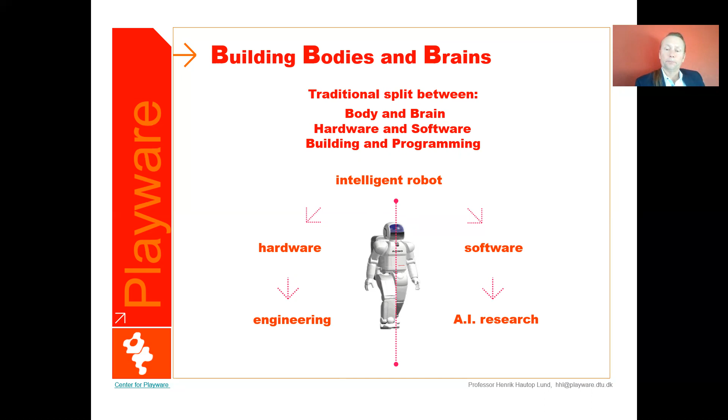We saw that last time we talked about the humanoid robots, how the body flexibility, the springs, the material properties, the environment, when the other players in the environment would have touched the ball, how could you then control if you are using the good old-fashioned way? Instead, we needed something where there was an interplay between all these different parameters playing a role, and not only saying that the only thing important here is the software, the AI in the software, but it's actually all those parameters together that we need to look at. So there is a big role of the body.

And again, we can explore that by splitting the body into, we could say, robotic building blocks, like we see here. So we say that a robotic building block is defined as having a physical expression, it's able to process, and then it's able to communicate with its surrounding environment. And that communication can, for instance, be to neighboring building blocks or through sensing or actuation. So in this case, if we have many building blocks, we would say the robot is constituted by the assemblage of all those building blocks.

So we would say that the overall behavior of a robotic artifact emerges from the coordination of a number of building blocks that each represent a primitive behavior. As we had in the behavior-based system, each building block is like a behavior, and we put those together, and then together, as we see on the video, that constitutes the robot, and together a certain behavior emerges from this. And you remember we talked about emergence earlier.

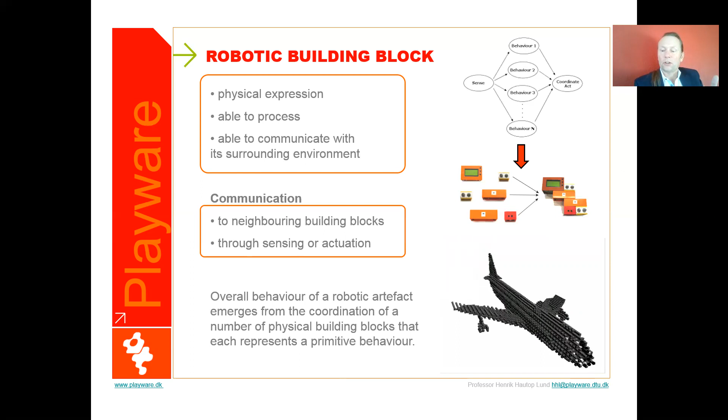Here in the video, we made a simulation of 7,000 modules following some chemical trails, and that would then lead to giving a certain body structure, as you can see here, when they're crawling upon each other. Something else emerges than just 7,000 modules, namely a certain structure. So you remember the emergence, we talked about that emergent behavior.

We would say it is the complex behavior that can arise from simple rules where the sum of the rules is more than just the single rules put together, but there's a complex behavior that arises from that correct interplay. For instance, when we see a flock of birds flying around, or a school of fish, or we talked about the example on the stadium with fans doing the Mexican wave.

So the behavior emerges from many simple agents that each have their simple behavior, but when they're put together, all these simple agents with the behavior, something bigger emerges. And that's what we're trying to do when we're creating the building blocks. So the building blocks are the small simple agents with simple rules, and then we put many of these physical building blocks together, and something larger, something coordinated emerges from that.

So one example of that is something like this. We created this in the HYDRA project: self-reconfigurable robots that can shape shift, that can change their own shape, as you may have seen, for instance, in films like Terminator, where you have one that can melt into another shape. So this we can actually do with physical robots.

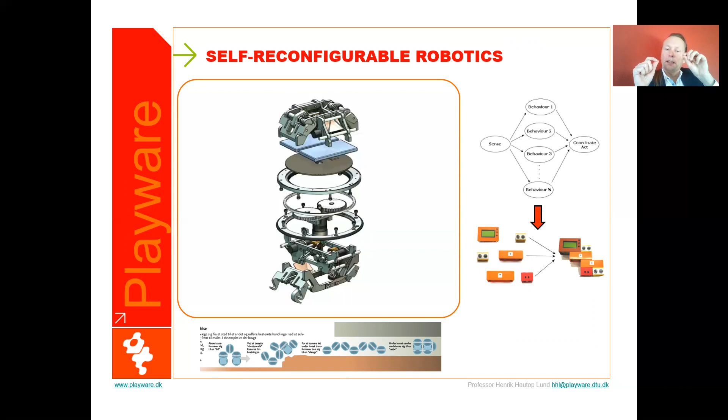If we think about the robot being built up of many atoms or many cells that are small robotic building blocks that can attach to each other, as we see here, they can move on each other, and they can change the shape from being a snake to a chair to a car, or whatever we may think of.

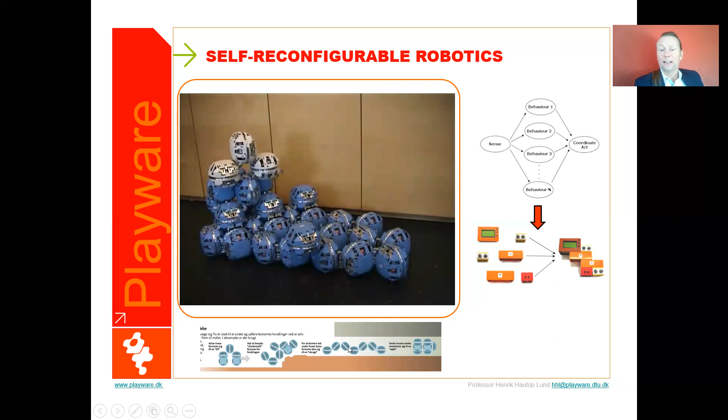Or as in the little cartoon here on the bottom, imagine a robot driving over to some place, then it crawls up on the ground here, and then it makes itself into a snake and into maybe a column here after an earthquake.

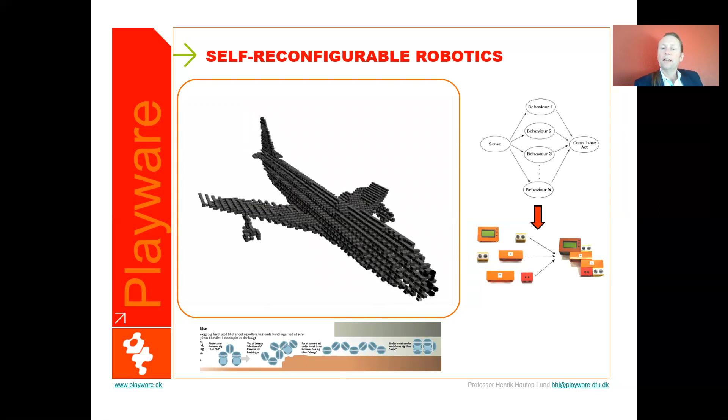If this is a building that has collapsed, then you can imagine this kind of rescue robot driving over there, crawling up, making itself into a snake, into a small hole, into the fundament, into the base of the building, and where it has collapsed, make itself into one or more columns that can sustain this until rescue workers can move in. And in this case, you see, we exploit this fact about being able to shift.

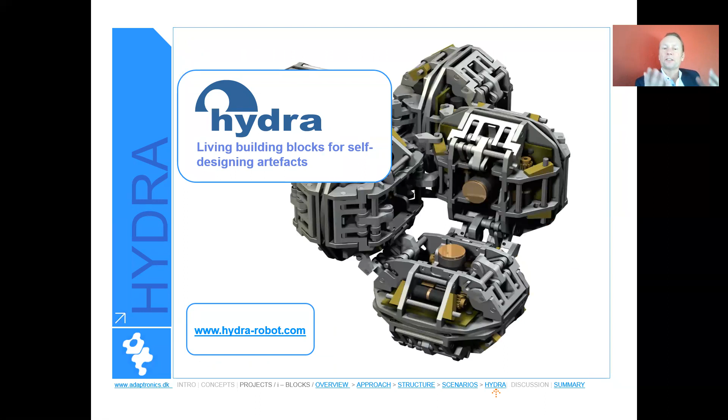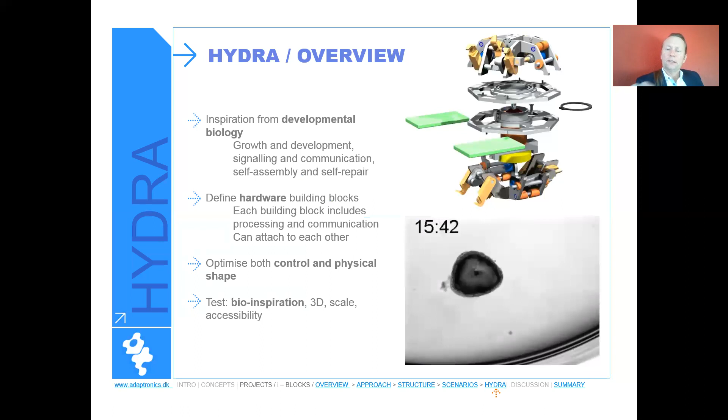So we explored that in this project here, trying to create these building blocks for self-designing artifacts. And the inspiration came from the HYDRA, from developmental biology, where you see on the video, this is a HYDRA. You can actually cut this small amoeba, and then after a short while, it will change itself into the original shape again. It will grow its own shape, so to speak.

So we took the inspiration from that and said, can we, in a similar manner, from the engineering point of view, create these artifacts that can grow their own shape, that can shift their shape from one shape to another. So in order to do so, we need to define the hardware building blocks, where again we say that each building block includes processing and communication, and they can attach to each other. And then, of course, we need to optimize the control and the physical shape.

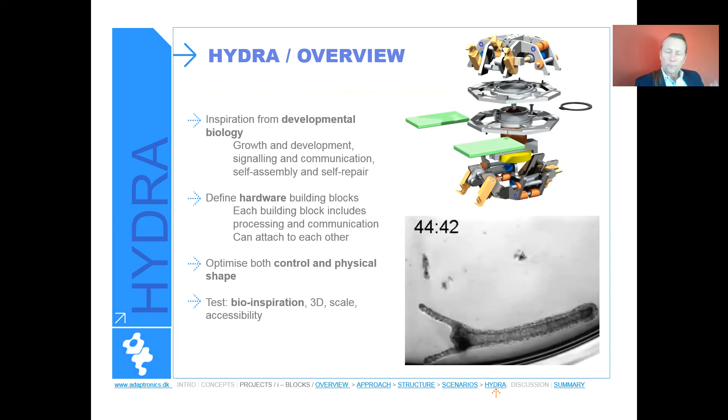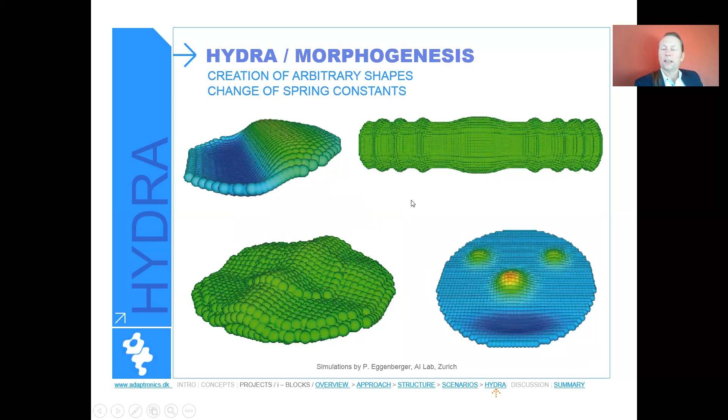So we can take some inspiration from biology when we do this, from morphogenesis, as was done here by our colleagues from Zurich, where they're creating arbitrary shapes from these spring qualities. You can see many modules here, and if the attachments have different spring qualities, then it will define different shapes to emerge. The shapes will emerge when these springs have the different constants, as you can see on these images here in simulation. So we can start doing simulation of this.

We can also start to simulate more precisely some modules that we would like to develop, like here, the ATRON modules. And for doing that, we looked at many different kinds of shapes and attachment structures and so forth. And we came up with this inspiration from certain atomic structures, where we would develop the modules as spheres that could rotate around the equator and have 8 connection points, so points where they could connect to each other.

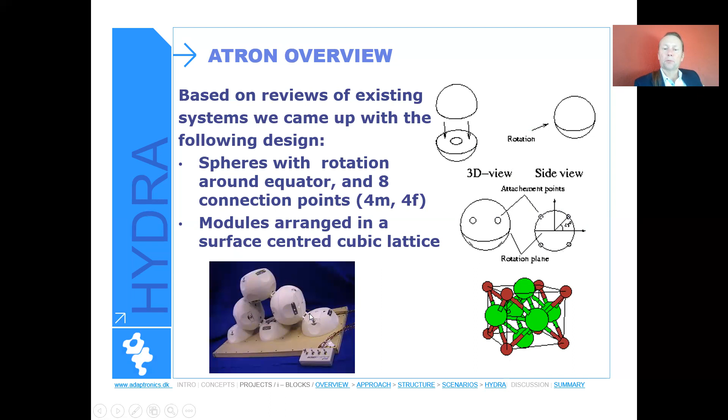And then they would be arranged, as we can see here on the bottom right, in a surface-centered cubic lattice, so that they would be able to connect in these different points, as we can also see on the photo here of the very first prototype of this system.

And then having defined that, we could start making a simulator and look at, can we do self-reconfiguration without actually building this in physics to begin with, but look at how these modules can attach to each other and traverse over the structure to make new kinds of shapes, or to make actual movements.

As you see here, this is a movement translating itself from one position to the next position, one step ahead. You can see in a while it will have made a full transition. Here it has made one step. Now it's going to take a second step where it translates itself from the previous position to the next position, and you'll see now it has taken one more step. So you can see it can by this crawl over the surface.

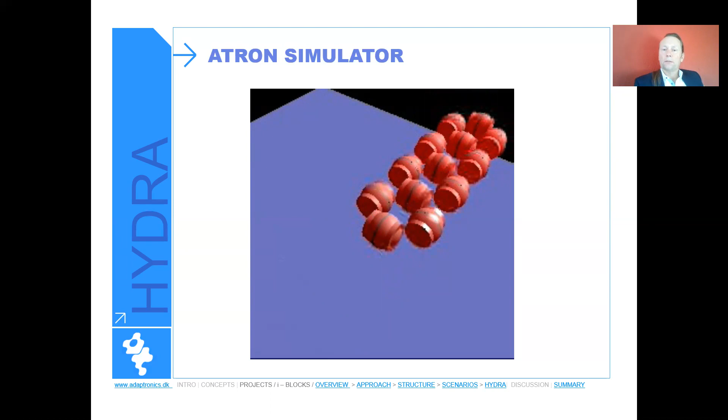So having that in simulation, we started to look at how we can create this in a physical form. As I said, with spheres that rotate around the equator, they have 8 attachment points. What you can see in the drawing here is one attachment point. This is a male gripper. So there are some male grippers like this coming from the top and then also from the bottom.

And they can go around like this, as I show with my fingers here, like this, to grasp around a bar, which is the female connector. They do like this and grasp around the bar. The bar you can see is here on this side, is this bar here. Or if we take it up on this image to the right, you can see the bar here where it attaches. And then, say in the middle, it can rotate around the equator attached to neighboring modules.

What we also did was that we actually put on the connectors an attachment point so that they could share the energy, the battery energy from there.

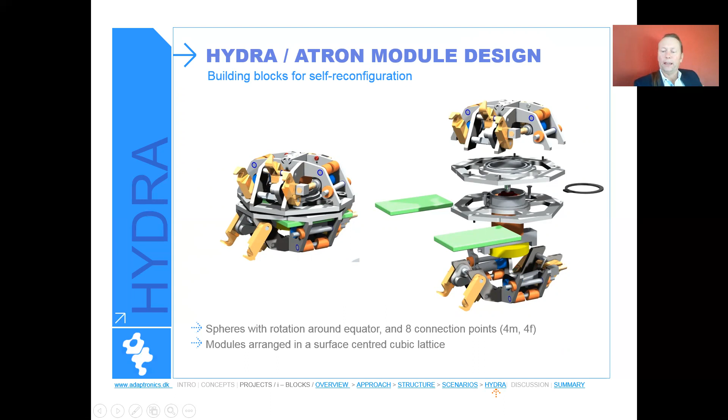And just to say the way that we developed this, and you may remember from the second video in this series, that we were talking about if we want to bring our research from prototypes out to the real world, and even in the end out to the real market, one of the best ways that we see doing that is through an iterative model, a cyclic model, where we're doing fast prototyping in this iterative fashion. So we get an idea, we make a design, we implement that design in a very fast manner as a fast prototype.

Then we try this one out, we test it and evaluate how it goes. And based on that, we make requirements to the next prototype round. So having analyzed the first ones in experiments, we build a new prototype. We deploy and test this again. We evaluate how this goes. By that evaluation, we come up with new requirements and we make the next prototype. So actually using this cyclic model, we can refine this step by step.

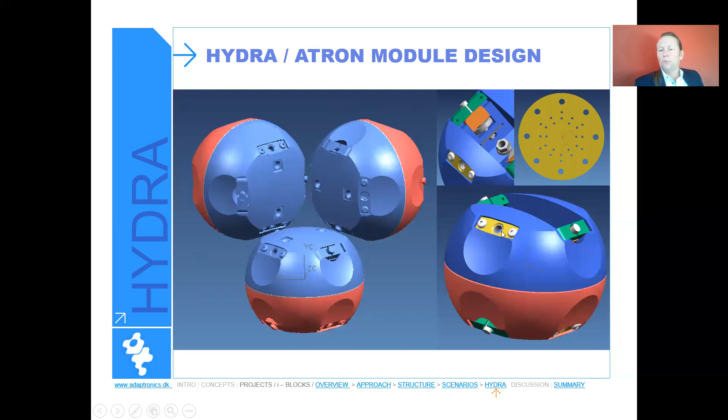So one of the first prototype rounds looked like this, where you can see the attachment mechanism is quite different. Here we were making some screws that would go out and they would go into this female connector here. And that worked to some degree, but not really to our satisfaction.

Another prototype round, you see in the upper left corner here, the image here, with a 3D printed shell here, with the connectors, as I talked about before, with the screws going out. Figuring out that didn't work, we made another kind of female. You can see the female connector here, the hole here, and then some grippers going out like this.

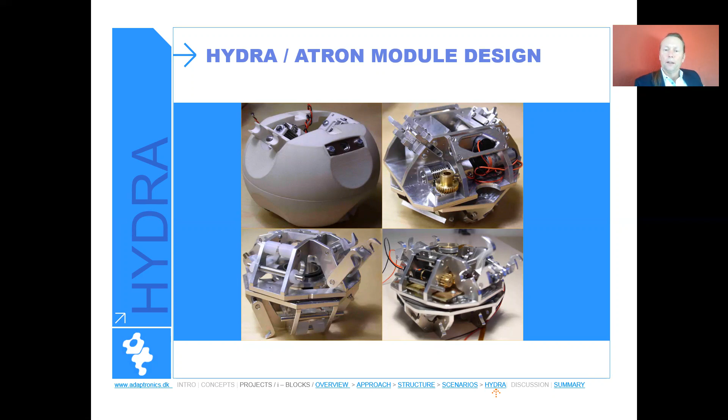And then later on came prototype round 3 here, and round 4 here, which are more the ones that I talked about before, with the male and female grippers, and the energy sharing and so forth, and a better mechanism for turning around the equator. So then you can see in the end, finally, with the light blue shell around it, modules like this, as you saw previously in the video. So again, an iterative development in cycles based on fast prototyping.

Or could we imagine that fully autonomous robots may be good for some things, but in other cases we need the human interaction, so that we may be able to go from self-reconfiguration to user reconfiguration. And that's quite interesting, because often when we think about intelligent machines, intelligent robots, we think of how we can create all this intelligence inside the robot, as part of the robot, and even, as we talked about, in the interplay between the body and the brain, the structure, the material, but everything controlled in the robot, self-steered, self-developed by the robot.

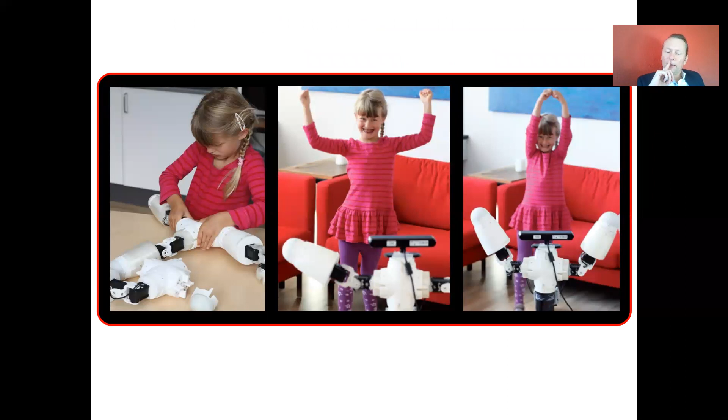Now imagine this thought: can you actually do this? Can you actually make systems where this is possible? Well, in this case here, you can look at the girl here. She's actually able to take modules that are created here and say, click, click, click, click. I put these modules simply together.

I create some kind of torso robot, and then I interact with this torso. I wave the arms and the torso waves the arms. I put my arms above my head. The torso mimics what I'm doing, puts the arms above the head and so forth. So she is on the left side, she's quickly building the robot, and then she starts interacting with the robot.

And here again, what we have done is we have split the robot into robotic building blocks, and we allow the user to build with this robot. So by physically building, she is creating both the body and the brain of the robot. So let's look at this in a couple of small videos.

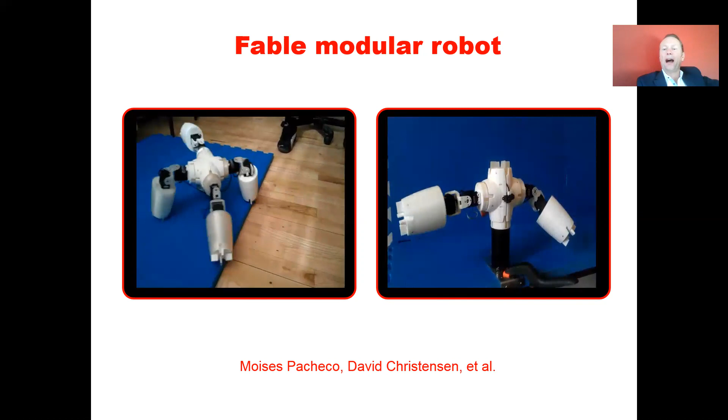Yeah, this is the Fable modular robot that we created in a larger project, and especially this was headed by Moises and David, who really worked a lot on this in our larger project on creating user interactive modular robots. You can see on one side, click, click, click, make a spider. On the right side, click, click, make this kind of moving arms.

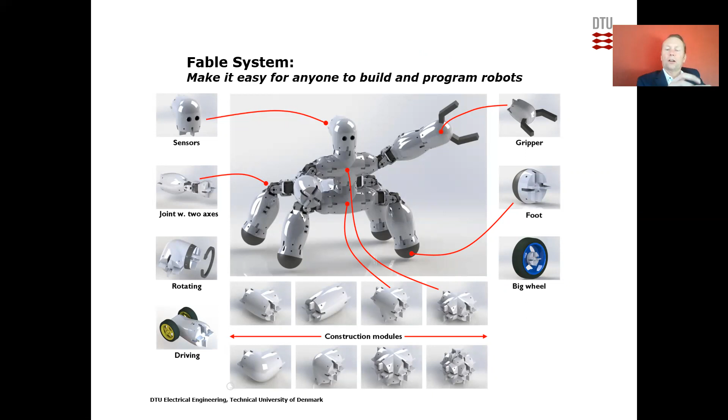So they have taken this further to create the Fable system to make it easy for anyone to build and program robots. Again, split this up into modules, many modules for sensors, modules for construction, modules for actuation. And then with this, you can build many different things. You have one system, but many learning opportunities. You can learn programming, math, physics while building the robots.

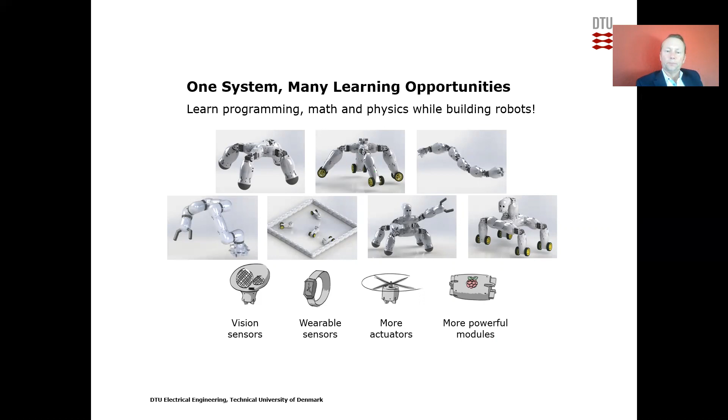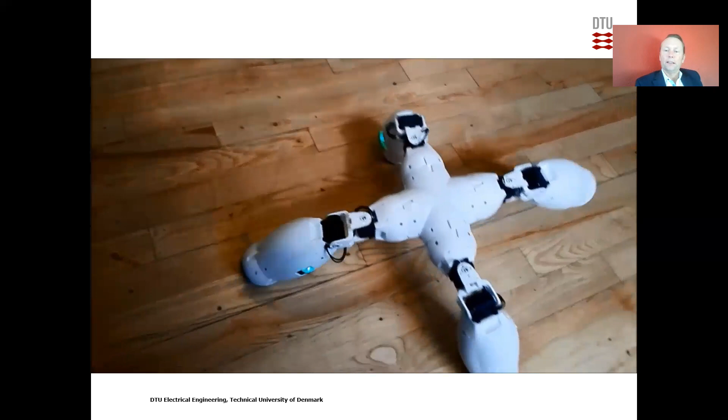If you, for instance, use this in an educational setting, with programming languages like some graphical programming languages like Blockly, or you can open up the box of the programming modules and see what's inside with things like Python. So they can do scaffolding like this. And here you can see a short video of the Fable robot system.

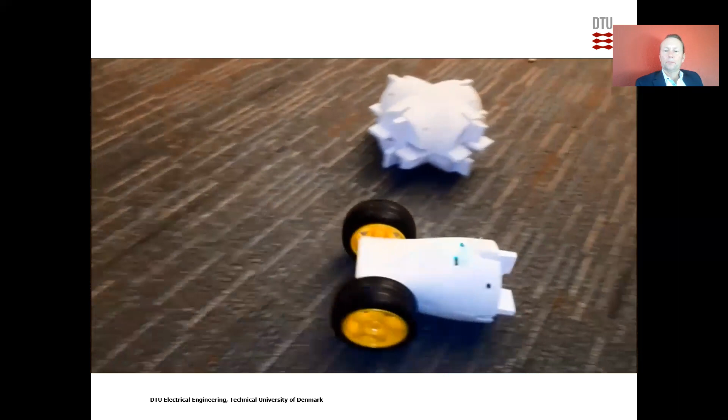Click, click, click, build a robot, and then you can start steering the robot. You can have other navigation modules like this.

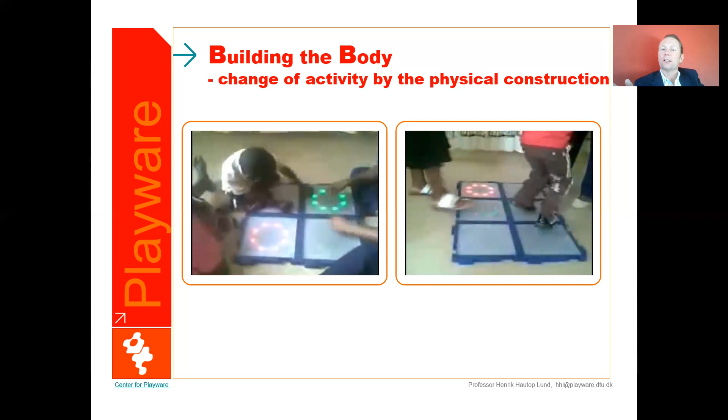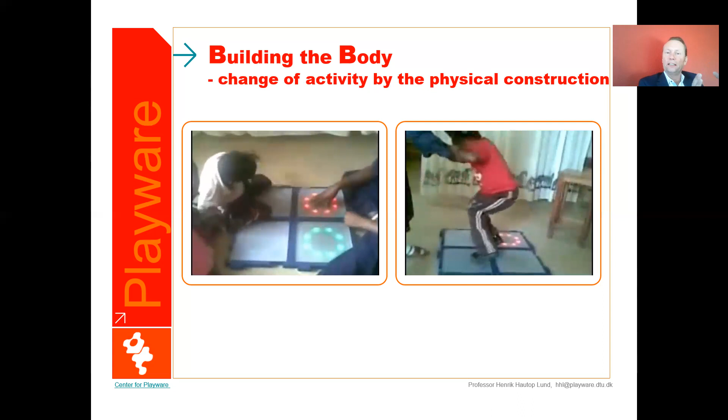So the therapist here is simply changing the activity by the physical construction. She's building the body, so to speak, the physical shape. And you see actually the software is the same, but what has been changed is the body shape, the physical layout, and that changes the activity in a very easy manner.

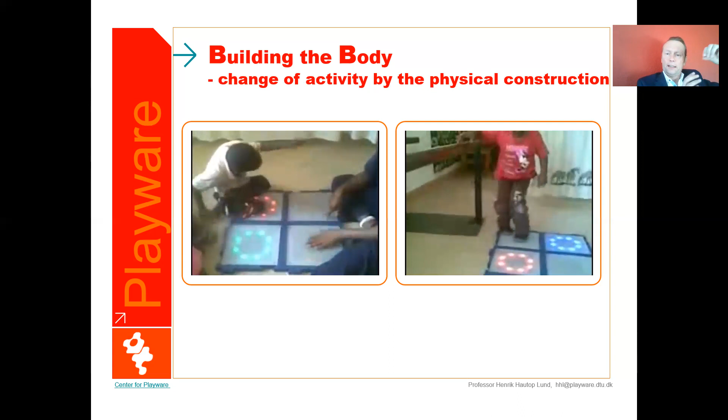So it's important that when you want to optimize, you can optimize both on the body and on the brain, which is often forgotten when we are talking about creating intelligent systems. They tend to forget the importance of the body, of the physical building, but only think that they can optimize by optimizing the software.

So now, building with the blocks is actually important. Here we can also see, by splitting things up into blocks, we can use this, in this case, with the hospitalized children, where we make different representations of difficult things with the physical modules. So in this case, we say that there's a representational determinism, that different isomorphic representations of a formal structure can cause dramatically different cognitive behavior.

And I will give you the example of the importance of the physical shape here, with things like the building blocks. It could be, as we saw before, these cubic shapes that we have here, where they're touching the sensors, or it could be things like Lego blocks here.

Now, if I go back here with these forms, what we say is that when we make things into physical shapes and physical manipulation, we are making some cognitive challenges easier to understand. And we do that simply by taking these difficult things like difficult mathematics or difficult engineering, or what you may find quite difficult. Imagine you can change that into something physical that you can manipulate. Then maybe it's easier for you to tackle, easier for you to understand.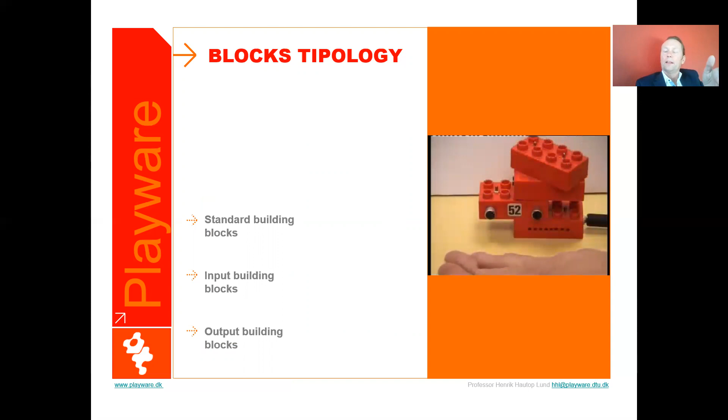So imagine you could have a number of different intelligent Lego blocks. And then you can imagine that we have this standard building block, input building blocks, and output building blocks. You put this together, and as soon as you put this together, you can interact with them. Here's a battery, a microphone, and a motor. And you can see as soon as one claps, it reacts. Very simple here.

But of course, then we need to understand how the processing should be inside these intelligent Lego blocks in order for the overall behavior to emerge in the right manner. So you can imagine the processing inside such a robotic building block, such an intelligent Lego block, to be of many different kinds. It could, for instance, be an arithmetic brick, where each individual brick is performing some arithmetic operation like addition, subtraction, multiplication, division, and so forth.

You could also imagine each block being a neural block, in the sense that each block is an artificial neuron. And then by putting more blocks together, the communication channels are the connections, or the synapses, as we call them, in an artificial neural network. So when you put the blocks together, they physically create a physical artificial neural network. The same goes for cellular automata, where the knowledge is based on what is activated in the neighbors.

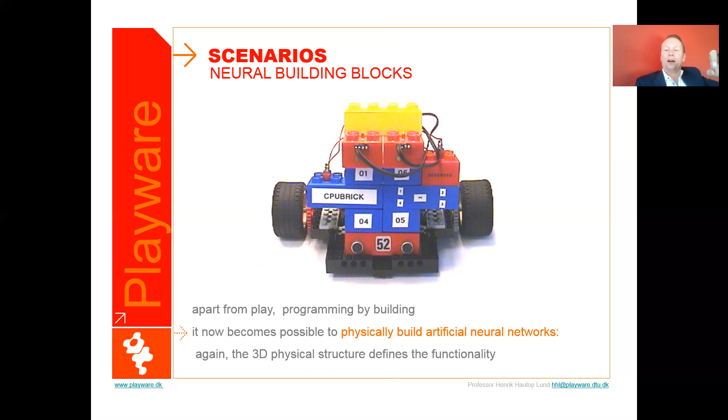There is an intimate relationship between the body and the brain, and that is why in the Playware ABC we're also talking about the B, building bodies and brains. Now, the building blocks can, of course, be more sophisticated also in terms of their control, their brain part. So you can imagine even building neural networks from physical building blocks. Like in this case, we would build what we call a spiking neural network with these building blocks.

So we would have a spiking neural network getting information from the sensors, sending that to a hidden layer, sending that to, you would say, an output layer that would be connected to the motor drivers. And that we can build in terms of the building blocks: input to some sensor modules, some intermediate hidden neurons, some combination neurons, combine 1 and combine 2, and then output to the motor drivers like this. So physically creating a spiking neural network with the input, hidden, and output neurons.

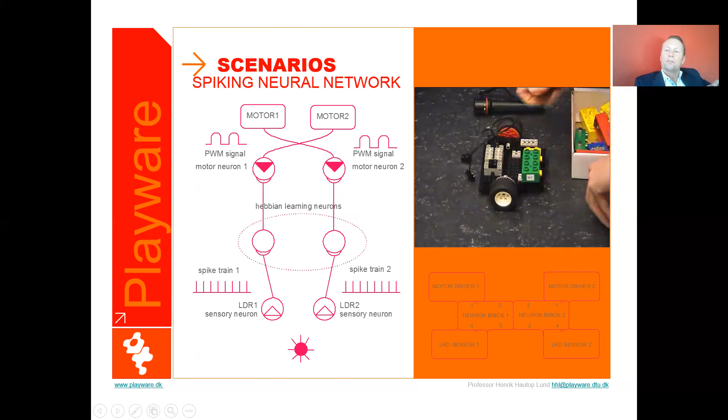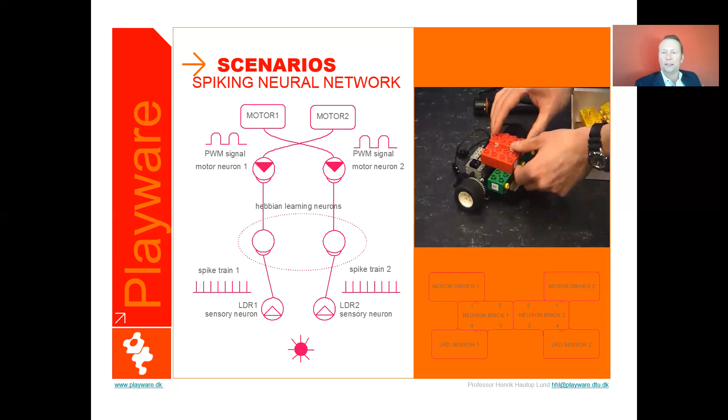And this we can see, for instance, in this video on the right side. There's a base robot there with the motors already built, as you can see, and now he is putting on the different neurons that we talked about. First, the lower ones; you can almost see they have the sensors on. These are, in this case, light sensors.

Then he puts on some hidden neurons, the red ones, and then the yellow ones that he's putting on now are the output neurons that will then be connected to the motors. You can see the wire now being connected to the motors.

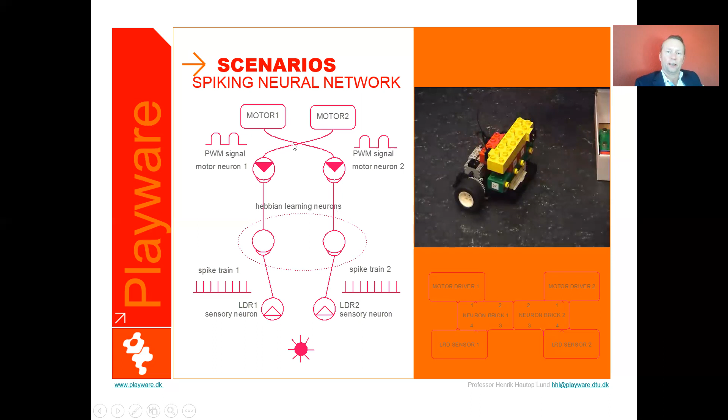And then having also the other one connect, you can see they're crossed as they are also crossed on the sketch here on this one here. And then he starts lighting up with a torch to do what we call Hebbian learning on the robot.

So this is a self-learning neural network that does what we call Hebbian learning. So if there's excitation on the output and on the input to a neuron in the middle, then it will reinforce the connectors there, going to and from that neuron. So this spiking neural network will start doing that kind of very simple Hebbian learning, and you can see little by little, it by itself learns to approach this light source.

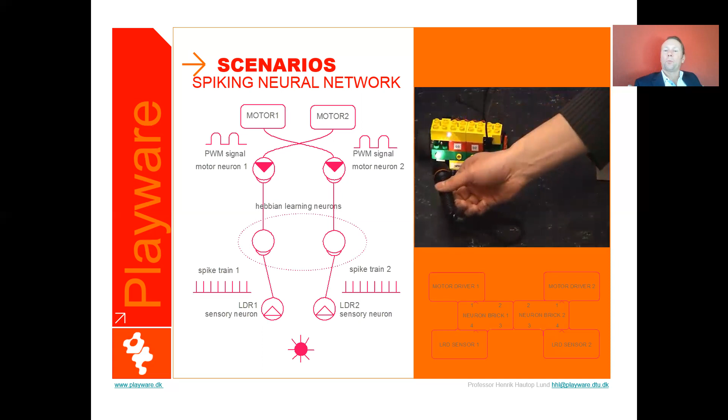So after a short while, he can start showing light sources further and further away from the robot, and the robot will start steering faster and faster towards the light source. And the only thing he has done here, he has built the physical body, and he has started to interact with the robot, with this spiking neural network, and it has by itself learned this behavior.

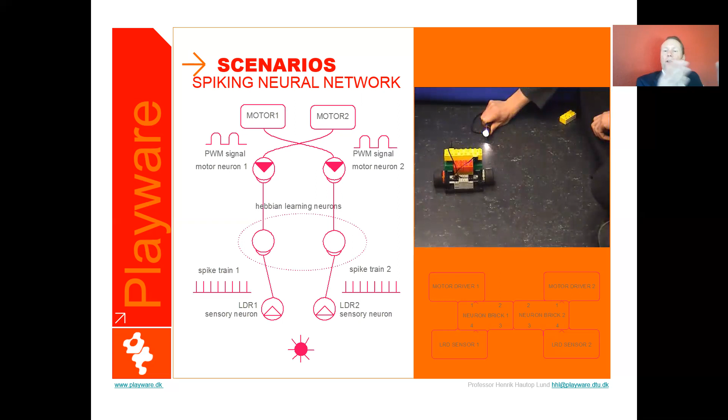So actually in one of the forthcoming videos, we'll look a little more into how we can create this kind of neural network, and these different kinds of neural network training that will allow you to do this kind of systems that can adapt and learn how to do specific things. Now here you can see how this robot can approach the light source from far distance, even if a minute ago in the video it couldn't do anything at all, or it wasn't even a robot at that point in time.

So important here, we can also discuss this a little bit further. What is happening here with these intelligent Lego blocks? If you think of the blocks as intelligent Lego blocks that you can put together and physically manipulate to create solutions, this actually has, as we touched upon, important pedagogical objectives: we are expanding the sensorial experience of the children, we're not only thinking about these very abstract things in the school class, but making things physical for them, as you saw with the Fable robots, the modules down in Africa, the intelligent Lego blocks and so forth.

So in all these cases, we allow the children to manipulate their physical entities to enhance their sensorial knowledge of the reality, and they can do an active modification of the environment with these things. So this embodiment allows them to understand more about the environment. They can explore that, they understand the material and technical aspects, and even also some emotional and conceptual ones where they are creating structures that can express different things.